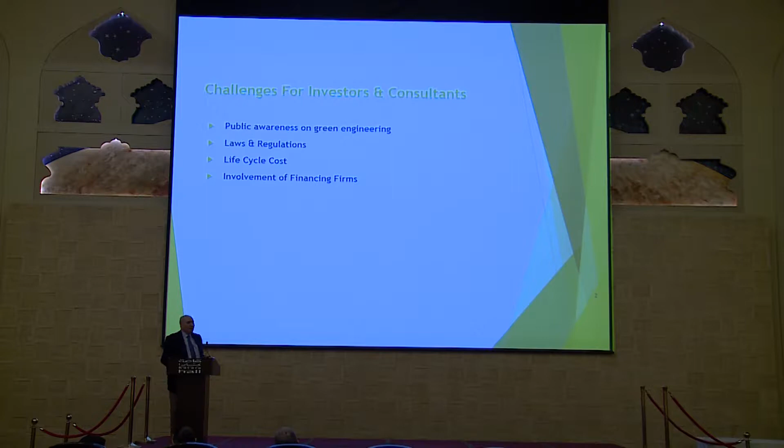And these challenges depend on the public awareness of the people, the public awareness of the consultants and the engineers as well who are working in the consultancy service. Another challenge is about the law and regulations which may provide incentives to the investors in order to make use of the green engineering.

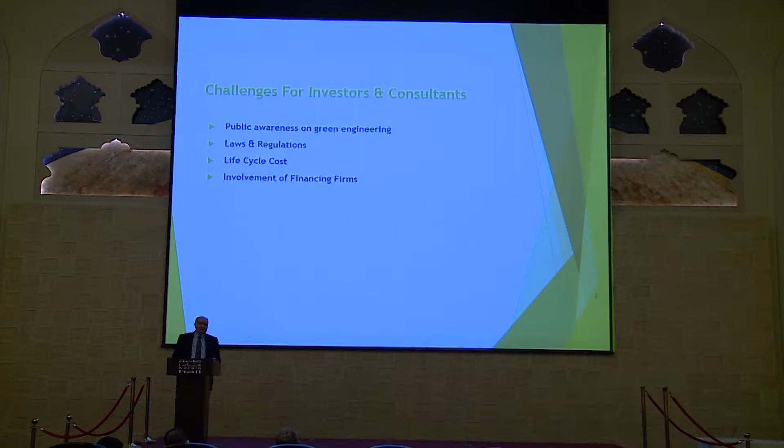Another consideration and challenge: people should realize the life cycle cost rather than the initial investment of the projects. In addition to that, both parties, the consultants and the investors, have to involve the financing company from an early stage as well. Application of green engineering is a joint effort between the owners, financing firms, the consultants, governments, authorities, contractors, and

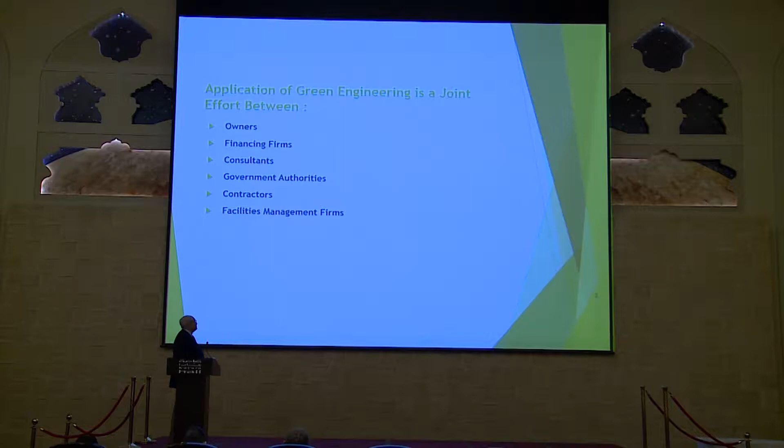the facility management. In the coming slides, we will review some case studies that have been applied before. This project is the Commercial Bank of Kuwait, and it was built in 1985. The idea of the building is that all these here, sorry, I have to take, hello? Yes. All these are glass blocks. The whole building is glass blocks.

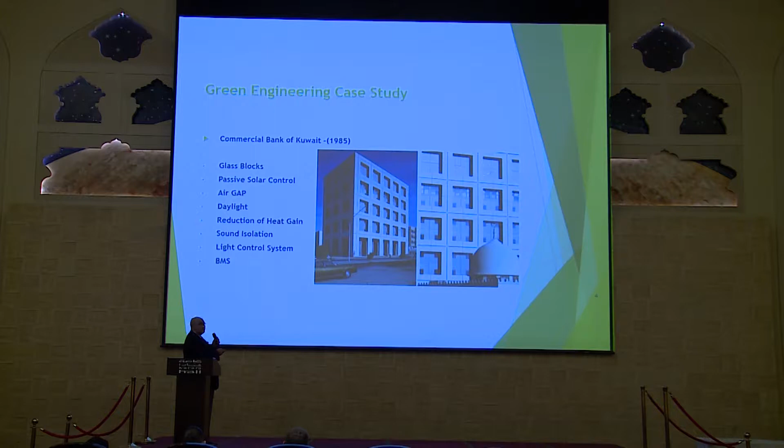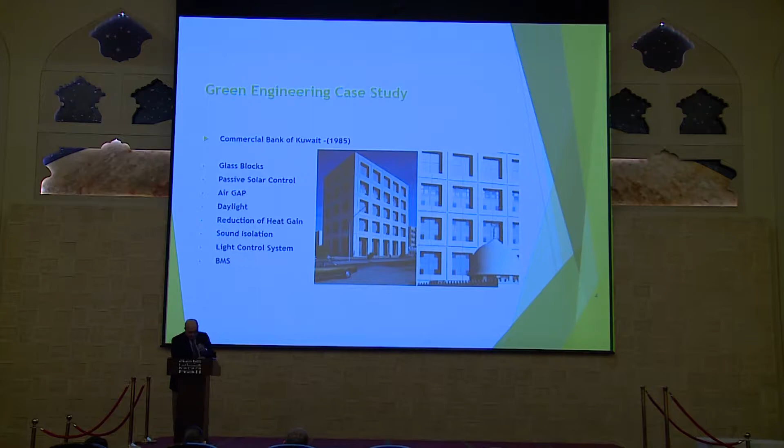Then it is covered by precast panels creating a facade of the building and maintaining an air gap between the facade and the windows. By creating that and using the glass blocks, there were the benefits of passive solar control that prevents direct sun exposure, the air gap which can reduce the temperature, using daylight as much as possible, and reducing, of course, the heat gain, as we said earlier.

The characteristics of the glass blocks provide sound insulation as well, and the building was provided with a building management system in addition to a light control. So there was a dimming system that saves energy as well.

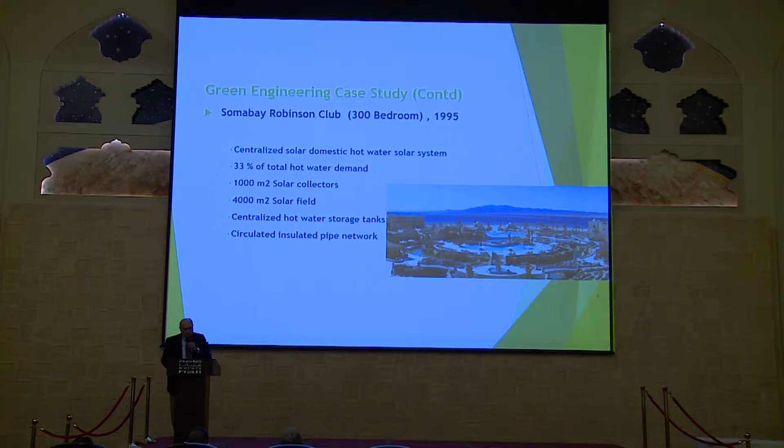This is another project which was created in Egypt in 1995, a resort having 300 bedrooms. On that project, we provided in the design a centralized domestic water system using solar panels. While making the design, we selected the capacity to be about 33% of the total demand of the building, which covers the requirement of hot water in the hotel during the summer.

By doing that, taking into consideration that the winter season in that area is short, we optimized the selection of the solar panels. And that was a centralized one. We used about 1,000 square meters of solar collectors on a land of about 4,000 square meters. Of course, we were using a circulated hot water system with a circulating pump, and the pipes were insulated.

Recently here in Doha, in 2015, we designed a twin residential building, and these buildings have obtained GSAS 3-star. The building, as you see here, has, oops, I'm sorry. Here, you can see that the building is surrounded with these twisted fins. These twisted fins provide passive solar control, so the windows and balconies are not subjected to direct sunlight. One of the features of the building is that on each floor, the residents can view the sea from different angles.

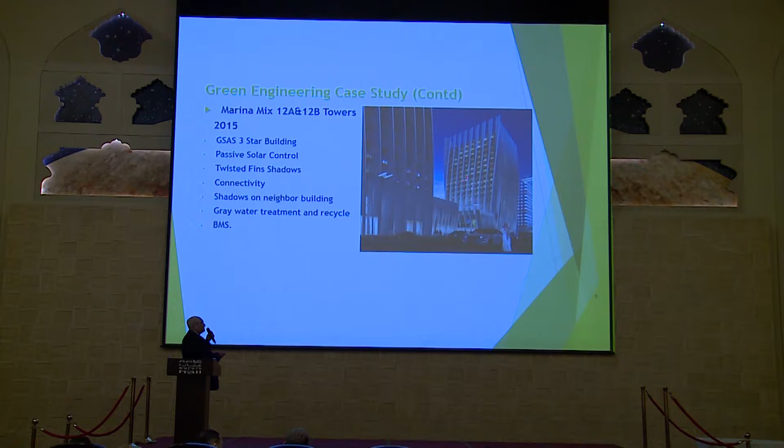In between the buildings, there was connectivity. The two buildings on the ground floor were on a podium connected with shades, providing proper connectivity with some points according to the GSAS. In the building as well, there was gray water treatment and recycling. I will show you some slides and videos that may give you the idea of how we came to the design of the building.

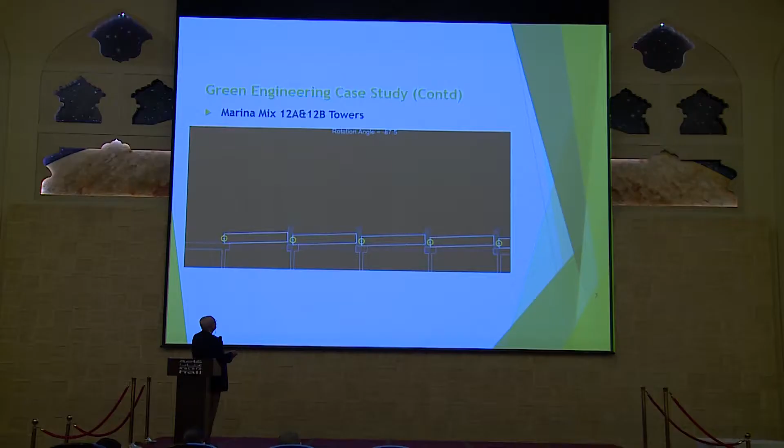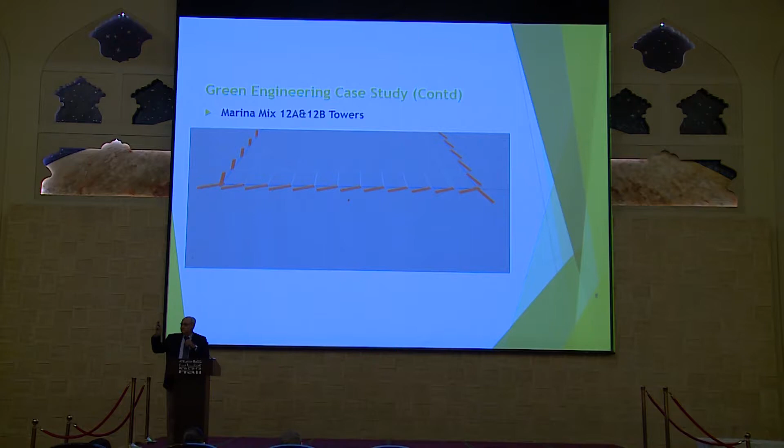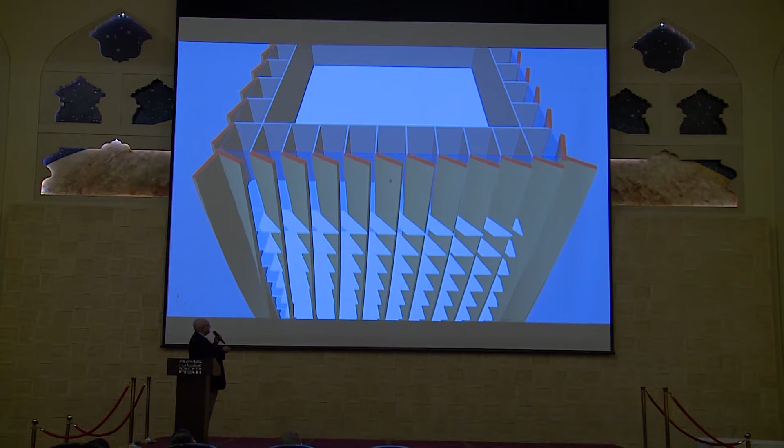As you see here, these are the twisted fins, moving at different angles on each floor. These fins were designed to create a different view whenever you are on a different floor. That's also how the design concept was delivered. Excuse me. You see the fins here, how they are twisted as you go up and the view changes. The balconies and the glass are inside the fins, so there is no direct sunlight there. This one shows the same, but from a different angle, on the elevation side of the building.

That might give you a better idea about the angle of view. So you can see that on the upper floors, they are looking to different angles from the lower floors.

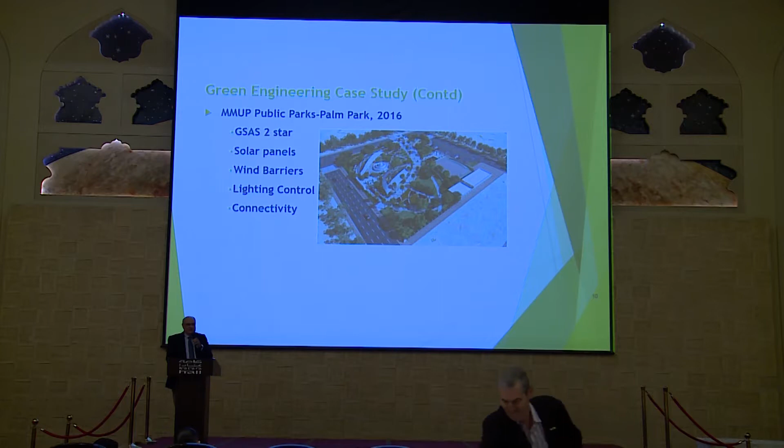That's maybe the last example we have. It was public parks, for the design of these public parks, and these are GSAS 2-star. We have used in there solar panels, wind barriers, a lighting control system, and one of the main issues as well was the connectivity.

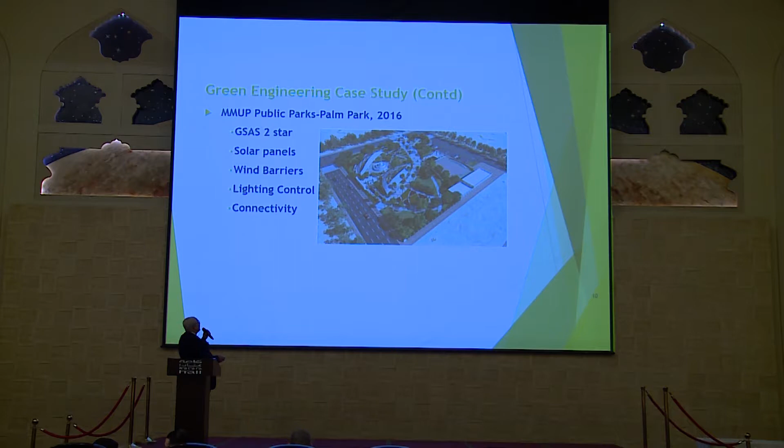So there was a solar panel used above the car parking area, above the shades which are connecting the parts together.

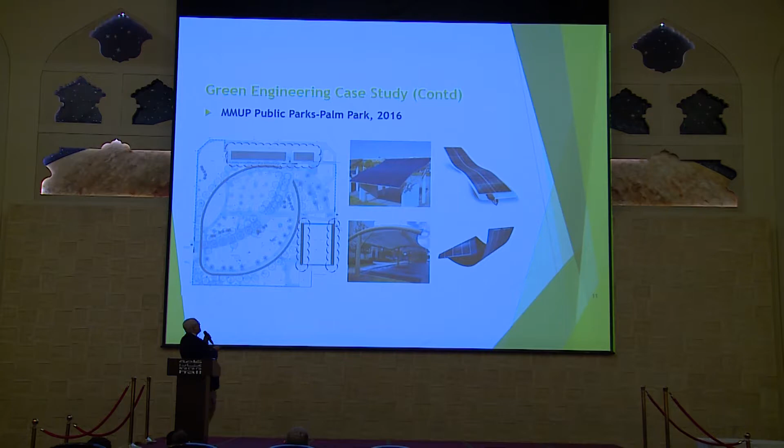I will just quickly go through the historical development of green engineering. Maybe you all know about the history of that, but quickly, the main issues started in Stockholm in 1972, where the governments of many countries gathered under the umbrella of the United Nations Conference in order to look into the human environment and the Earth's environmental problems.

Twenty years after the meeting of Stockholm, there was Rio de Janeiro in 1992, where the draft of the Kyoto Protocol was prepared. In Japan, 1997, after two conferences of the parties, which we call the COP, they met twice, and at the third meeting, they concluded the protocol.

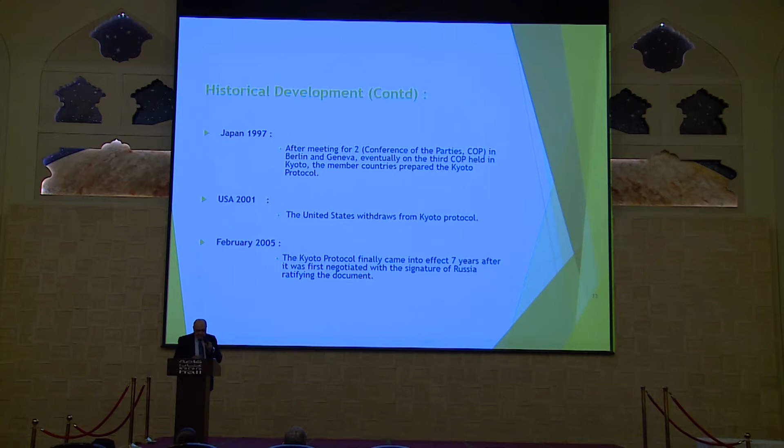One of the major issues happened in 2001, when the United States withdrew from the protocol. However, in February 2005, more countries signed the protocol, and Russia as well signed the agreement.

In Qatar, the QGBC Council was formed in 2009, established by a decree signed by Her Highness Sheikha Moza, and the council is concentrating on supporting the overall health and sustainability of the environment, the people, and the economic security in Qatar for the generations to come.

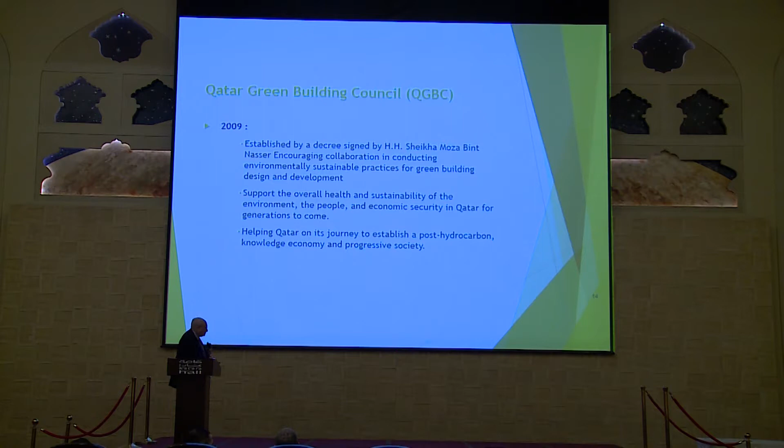Right. When we talk about sustainability, there are two terms, which are sustainability and green engineering. So, by definition, sustainability involves taking action now to enable a future where the environment and living conditions are protected and enhanced.

Whereas green engineering is a complete process, including the design of materials, the process itself, the systems being used, and the devices, with the objective of minimizing the overall environmental impact over the entire life cycle of the project.

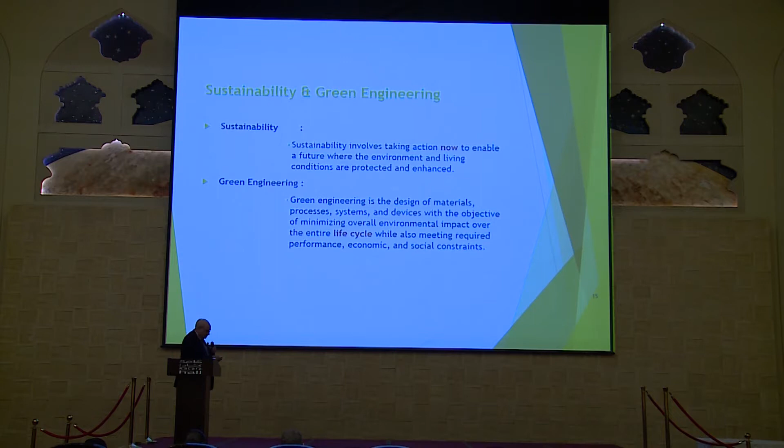Green engineering historically was considered to be a portion of a project. However, nowadays, it is considered to be a minimum requirement, with focus on how this is consistently achieved.

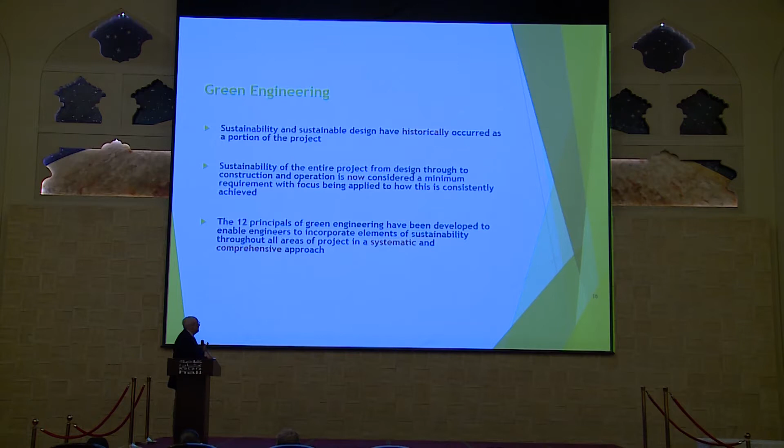We start with principle number 1, which is about inherently non-hazardous material. So while making any design, we all have to check the hazardous material and try to avoid the use of hazardous material, whether in the input or output.

Principle number 2, prevention as opposed to treatment: the better approach is to prevent the waste than to treat it. So in any process or any design, we should prevent the waste rather than create it and then treat it.

Principle number 3, design for separation. We have to avoid separation and purification operations, as it is a costly approach, and it requires treatment after that separation. Systems as well may fail, and then whatever protection or system we are going to use can cause damage as well.

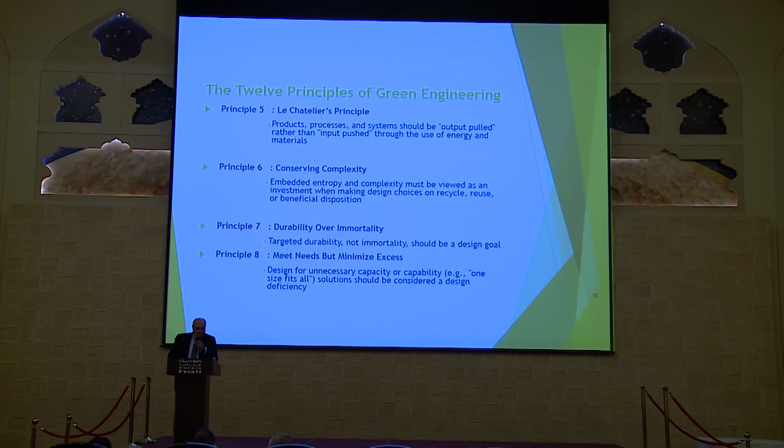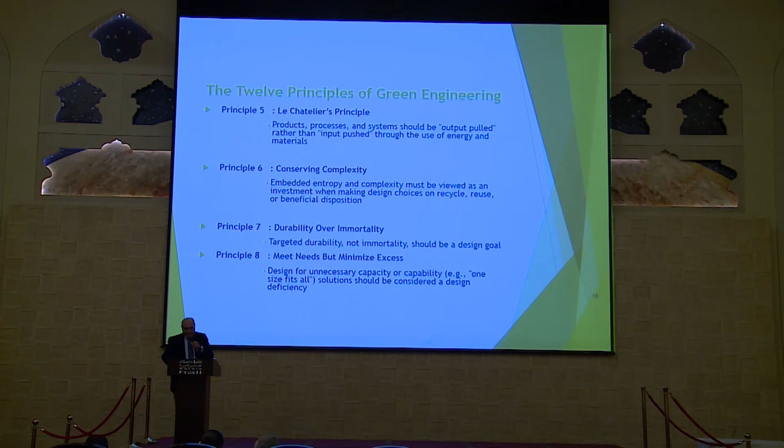Minimize the material diversity. As well, we have to keep the number of materials being used in the systems as minimum as practical, in order to avoid the diversity of the materials, which obviously requires knowledge, maintenance, and additional cost to the project.

Principle 10 is to integrate the material and energy flows. The design of products, processes, and systems must include integration and interconnectivity with the available energy and materials flow. So we need to use the available energy as much as it is available.

Commercial afterlife, this is principle 11: products, processes, and systems should be designed for performance in a commercial afterlife as well. Meaning that if we are using a system and there will be an output from that, we should recognize what we are going to do with that output at a later stage. Principle 12, the last one, which is the obvious one, is trying to use renewable rather than depleting resources.

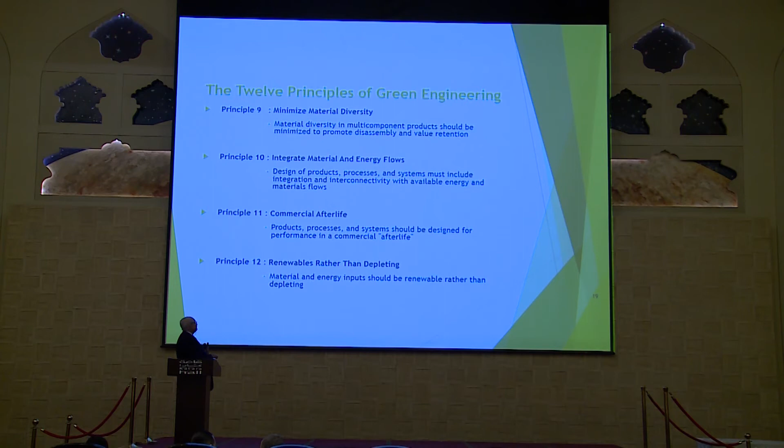I'm sorry, you didn't see the other screen here. Okay.

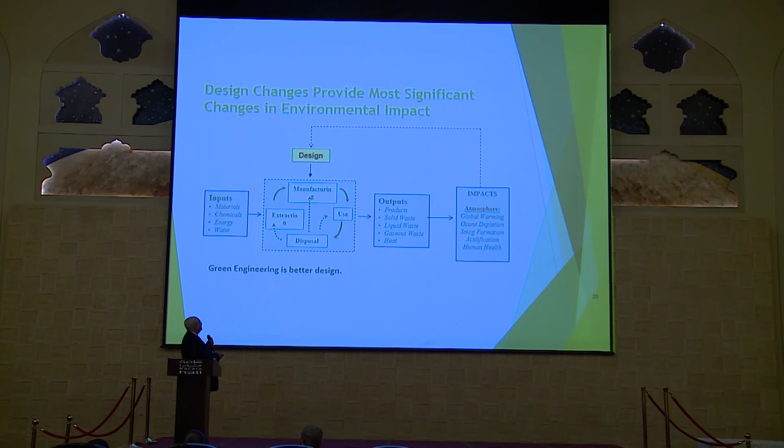The common question is, is green engineering costly? If yes, how much? Normally, people are considering the initial investment, and this is the issue which we talked about, that it has to be clarified with the investors from the beginning of the project in order to avoid only considering the initial investment without considering the life cycle cost.

For the initial investment, there are two approaches. The first approach is to make an optimum alternative in the design, and this one will lead to an increase in the initial cost between 4 to 12%, depending on whatever you are going to use. The other approach is to go for an economical alternative. The economical alternative can make an additional investment of 0.2 to 1.5% of the total cost.

Whereas the life cycle cost, considering the impact of the system on the environment, whose cost is not built into the initial cost, has to be allowed for. People are paying that through taxes, or the government is paying that as well in some countries like here. In fact, the sustainable product or process provides a cost saving over the entire life cycle when considering the cost of operation and the capital cost.

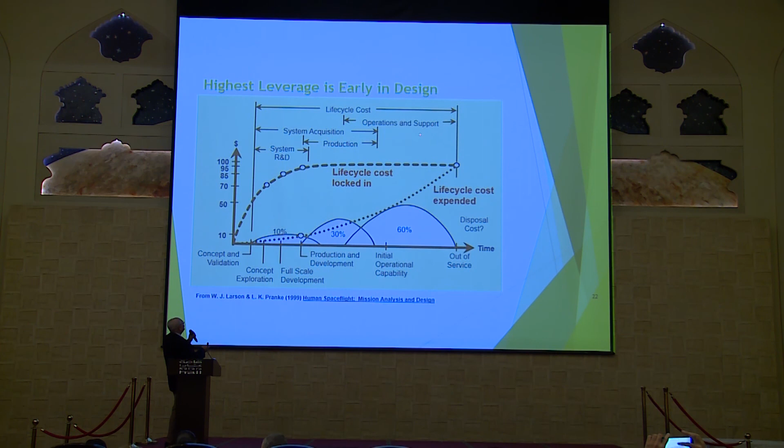So all these parameters have to be considered in the different stages of the design, from research and development, production or construction, and then system acquisition, operations and support, in order to reach the life cycle cost.